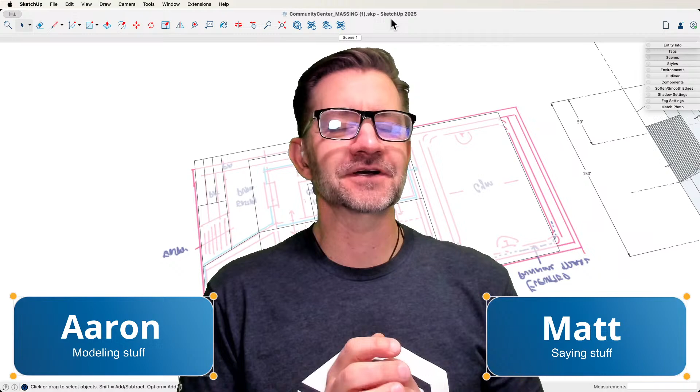I figure there's a couple ways to go. We could just hop on here and start modeling something casual. But we figured it made more sense to talk about the new version. Let's get into it. What better way to do that than by exploring the model we've been using for the imagery and the videos, the community center model you guys have seen already. Let's talk about how that got made, and through that, let's talk about SketchUp 2025 and the features in there.

It's fun because you really never know what you're going to get when you stream. You can test things and it'll be fine over and over again, but then sometimes it just isn't. Let me try adding this.

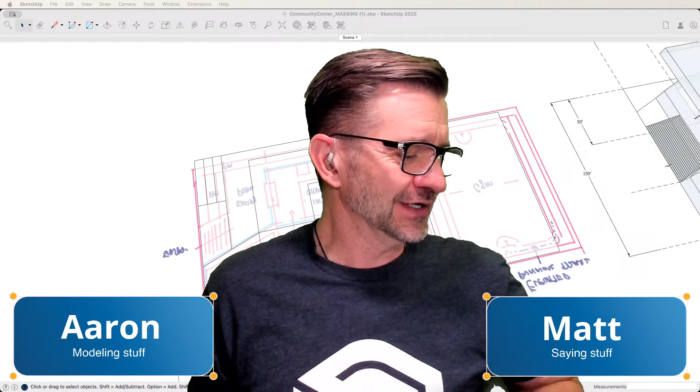I need to make sure I bring Matt with me, so we're gonna switch scenes and it'll be quiet for just 1 second while I bring him in there too. So let's hop over. Goodbye, my love. Hello. Nope, he came right over. That was perfect. All right, everything worked out except the overhead camera is not working now. Oh, good times. Good times were had by all.

I want to open this up though. I want to throw this out into the Chativerse. Have you gotten 2025 up and running yet? And if so, what's your favorite piece? Let's hear some feedback. We did have everybody chiming in from where they're from, and as usual, we got an international audience here. We got people from all over the globe. Somebody was saying it was like 8 p.m. their time.

So it's commitment. Yeah. Oh, I'm not gonna be here. Or you look forward to it all week. 8 p.m. on Friday, I know where I'm going to be. That's right, I don't have to make plans for Friday night. SketchUp's on. Yeah, that's good stuff. I'm booked.

Yeah, so we're here, we're doing this. Looks like everything is working now. So we want to talk about 2025. We want to talk about the version. We want to talk about some of our favorite features. We want to hear from you guys.

Having installed 25 is not a requirement for enjoying the stream. In fact, we want people who haven't gotten into 25 yet to show up and tell us their questions. Ask, what are you thinking about 25? What questions do you have? What do you want to see? Let's hear it. I can't say that we'll be able to go in depth to everything, but we will do our best to show what we know about 25.

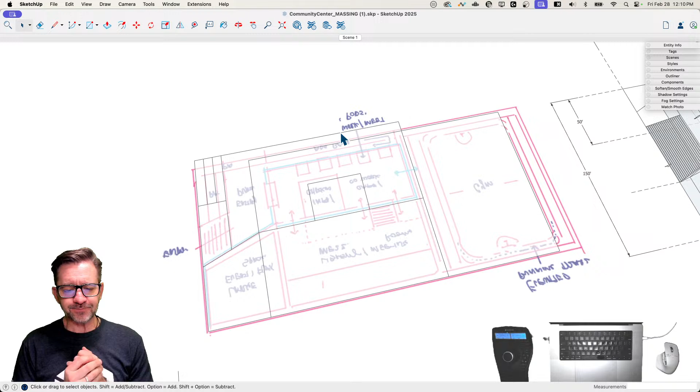So what I want to show real quick is Eric's initial massing model. For those who don't know, Eric was with us for 7 or 8 years, I think, and he was on the SketchUp team. He worked on the Campus—his Campus courses are still up there, and the videos he made as part of our team are still on YouTube. But he has moved on to a different opportunity, something he wanted to try. So, all good—good stuff.

I talked to Eric earlier this week. He's doing good, he says hi, and he was actually going to try to drop in here too, so we may see him in the chat as well.

He started with this, and you can see shadowed underneath this initial 2D layout, he has a hand drawing he did on his iPad. You can kind of see what he was going for, the flow of the building, with this entryway, a 2-tier or 2-floor section here, a theater space here, a gym over here. He started with this hand drawing and then came in with these 2D shapes and mocked that up over top.

So moving along here, here's kind of some... I'll pop in real quick, we did have a couple questions in the chat. Bring it. Not to derail you too badly, but I'll let you get a sip of coffee.

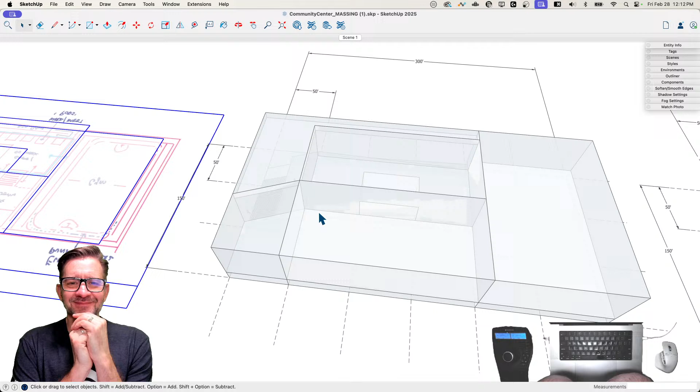And can you start over? Yeah, we're basically just starting now, so you're in luck.

Thanks, Randy. Okay, so we have kind of a sugar cube massing model here. You can see it's a lot of the 2D shapes just kind of raised up and played with a little bit, just to see how would that work, and some preliminary dimensions - how big is this building going to be, what's a realistic size, that sort of thing.

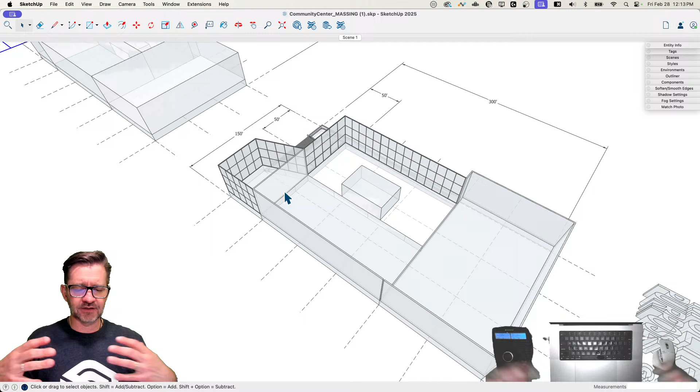So moving along some more, right over here we had some kind of initial look at the building front, where the glass would be, how would that look. We had this little blocked off section in the middle, the larger gym on the side. You can see the grids under here to give a layout or give an idea of the size, layout, that kind of thing, so you can work in pieces.

So you can see the initial progression, going from literally the napkin sketch - well, not literally, because it was an iPad sketch - that sketch, 2D, 3D, starting to put some texture, and you can also see the front entryway was mocked in here, with some quick stairs, a couple people, just to show the shape of that.

And this is one of my favorite things that Eric did - he took that space and labeled it in 3D volume. This may have happened before, but I thought it was really cool because it not only shows what goes where - your library, info, lobby, the plaza, the stage - but you can see he also gave height to it. In the gym, this is a full 2-story gym that's up tall, where the entryway is short and then it kind of comes up. You might also notice this is actually backwards of the way the whole thing laid out, so he's showing the progress of that design, how it changed around.

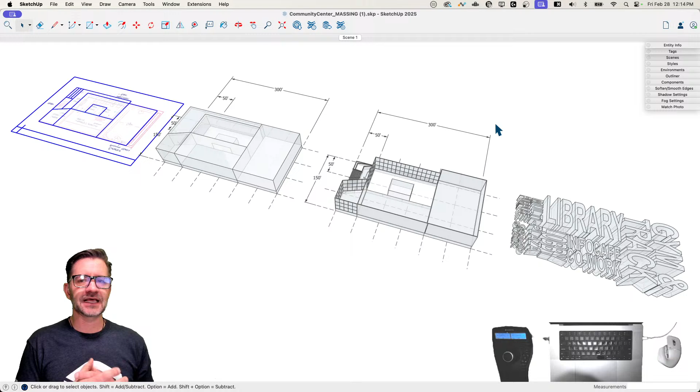So kind of cool, and it illustrates what SketchUp's really good at - giving you those 3D drawing tools and getting out of the way. This is not about V-Ray, not about visualization materials or anything else, this is just straight SketchUp right here, easy to get in there and make that whole thing happen. I wanted to share that because I thought it was a cool progression from zero to a 3D visualization of the space.

Yeah, and like you were talking about earlier, it's not as much work as making the model itself and figuring out how everything goes together, but the conversations that we had of like, what should even be in here?

You know what I mean? Like, what would a community enjoy to have? What would be interesting to have in here? So being like, well, it'll be nice to have the theater in the front because then people could look in and out and see it.

And then the gym area too, kind of. The whole thing was interesting to me, like just saying, oh, maybe there should be a place for meeting rooms or little work pods. And then Eric's like, here it is, in real 3D. And I'm like, oh wow, this is awesome.

So yeah, it's definitely fun to see it at that stage of the development, where the design is like there's so many things that could happen. So it's cool to see the shapes and the spaces come into reality.

And it's very interesting for us, because I've talked about this on streams before, how I got the best 3D modeling job in the world because I get to model whatever. It's a double-edged sword for me though, that's what I've talked about, is I don't get to really master any specific kind of thing because we always jump around with what we're modeling.

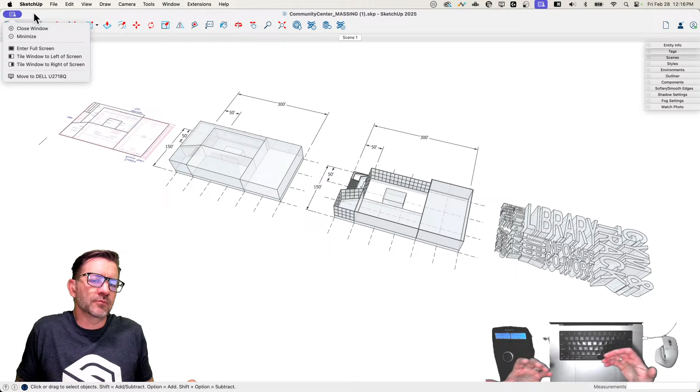Like, what would that be? Let's be intentional about this. Let's not just put things in there because they're going to look cool when they get new materials on them. Let's put them in there because the building makes sense, the story makes sense, and that was a lot of fun. Eric definitely led the charge, but we did go in and share ideas and review the process through SketchUp, which was a lot of fun.

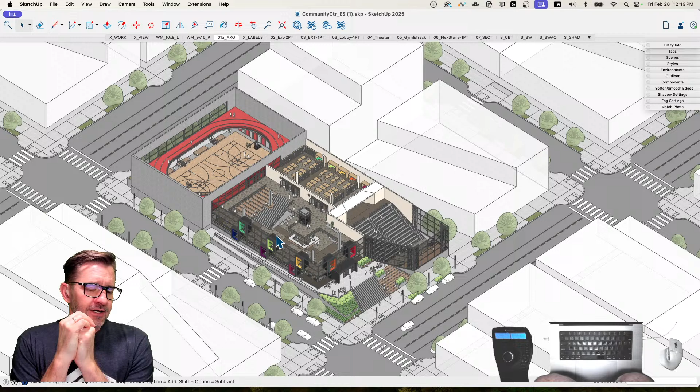Yes, show that process. Let's get technical on the stream. Hey.

Ooh, soon as we go to any Explorer window, I'm kind of, yeah, I don't know.

Just to touch on this seriously, one of the big things you've already seen in videos about 2025 is the visualization. I know we're talking about it and not showing it, we'll be there in a minute. It is an option on top of SketchUp. So if you like those white clay model working documents, working models, you can still do that. You can still go in with basic colors, no shadows, no image-based lighting. You don't have to use all of that. You can use SketchUp just like it was. But if you do want to go deeper and get those additional things, it's like a cherry on top of everything.

Yes, and thanks Colin for chiming in that you can get the old materials on 3D Warehouse as well. There you go.

All right, so let's hop in here because I want to get to that stuff. So what we're looking at could technically be the same in 2024 or 25. I want to get through this.

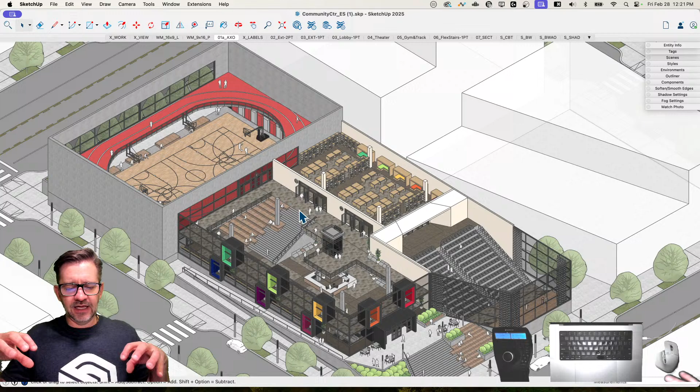This is a look at that model as Eric started filling it in. You can kind of see here how those different blocks of spaces came together. Here's the big two-story gym at the back, here's our front foyer, grand stair, the welcome desk, the information desk, lobby, meeting rooms, library, the theater. You can see how the pieces, the different modules, kind of stuck together and then all worked into one piece. I'm not going to go through all the tabs here, but this is one of the images I think is really cool because it's got that cool isometric look, which I think is a fun way to see an overview of a building. You can also kind of see how the different chunks transferred into that, and I just think that was super cool.

Yeah, one thing I really like too, right towards the center, you can see that staircase, and then there's kind of the bigger stepped wooden staircase. I thought that was a really cool addition. You can sit and hang out, have a little more room to talk or have a coffee or whatever, built into the main stairs. So I thought that was cool. Absolutely, I think that's an amazing space.

I also wanted to call out, this is something we learned as the creative team at SketchUp. If you look here, there's these little images. Right here I have a little guy running, here's a little book, here's a comedy and drama mask, on the information desk there's a little eye in a circle. A lot of the content we create ends up getting localized for different languages, so we need to be conscious when we make models that we can't put in big blocky text. We can't just say gym this way because the word gym doesn't mean anything in Brazilian Portuguese - that might be a lie, that might be the same exact word, but there's a language out there where gym doesn't mean anything, and we probably translate into it.

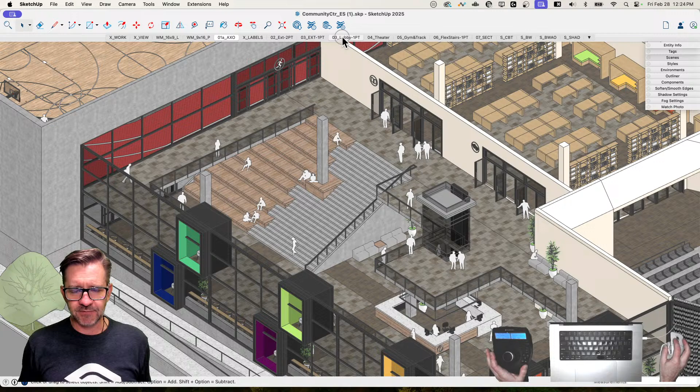I'll click through a couple of things here. These were the kind of images we were looking for. We knew this work was done just with modeling - you can see a little AO, a little ambient occlusion, but these aren't the new materials, and there's no image-based lighting at this point. This was just to create a model we could take further.

But here's the lobby, the theater - again, very intentional about these. These were the kind of shots this model was built around, how can we have, in one model, some very different looking spaces. And yeah, this is why the Community Center is so cool.

Sorry to interrupt, but one thing Eric did too was make this model kind of a SketchUp version and also V-Ray ready. So the curtains aren't actually that material - or they are that material, but when you bring it into V-Ray, that's like a V-Ray material. The trees have this weird outline, but those are V-Ray trees in there, so that's why they look like that.

So another piece too that Eric included in the model. We also had a question from StudioRT Cool.

Can skydomes from V-Ray or SU Podium be used by SketchUp 2025? So SketchUp 2025 can import environments that are HDR or EXR files. So if you can get those skydomes out of those programs as either HDR or EXR, then yes, you can import them into 2025.

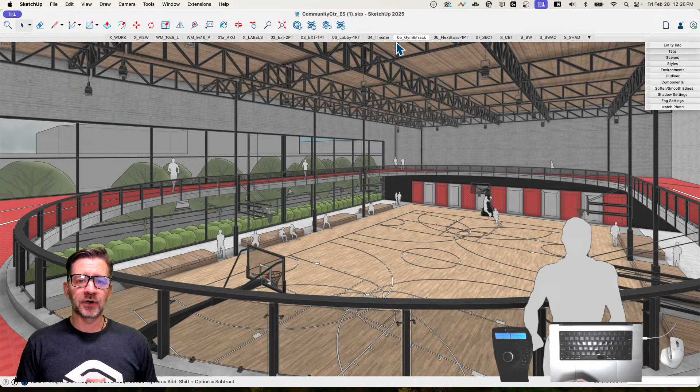So it was a cool opportunity to come up with how many different spaces we can create in one building. I mean, obviously we build a lot of office buildings, we build a lot of homes, that kind of stuff, and there's lots of cool views to be had in those buildings. But this ended up with a set of very diverse looks and feels in the same building that still made sense to go together.

It doesn't feel like - that was another thing done intentionally and it worked out very well - like we took a bunch of disconnected things and just jammed them all together. It's done in such a way with intentionality that the whole building works together.

I wonder if this ceiling was inspired by the Vancouver Convention Center, because it's giving me those same vibes. Yeah, it certainly looks like that for anybody who went to 3D Basecamp in 2022 at the Vancouver Convention Center, or you could just have been at the convention center before. But yeah, that's a cool ceiling, definitely vibes of the VCC.

So this is about where Eric got to when he left our team. We knew we weren't done with it, so we brought another guy back onto the team.

Justin Horstman, who was our designer for a number of years, came on to come in behind Eric and work on our models. And I'm going to share the model that he got us to. So this one right here, you guys probably recognize as the model you've seen in some of our videos already.

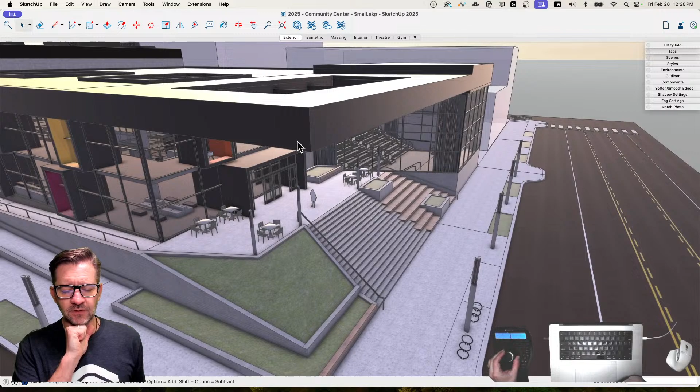This model is built from the exact same - a lot of it is exactly what Eric built - but you can see we got new materials on there. I should give Cassidy Shipley credit as well, one of our product management team. He spent some time on here adding materials as well, just to get the most out of it, get all those PBR materials on here.

If you haven't seen this before, I want to walk through a couple things. As I spin around this, I'm using my 3D mouse to move in 3D space, but look at how the light changes. It's not quite as simple as materials getting brighter or darker, more light or darker light - there's actually colored light coming off of that image of the sky dome and changing how it plays on surfaces.

I know I did this in other videos too, and I apologize, but it's such a clear illustration. So right here we have this shiny black material, some sort of metal facade. As we turn it this way, you're gonna see the orange from the sunrise hit across here, and because it's shiny, that orange color actually creates a gradient across there.

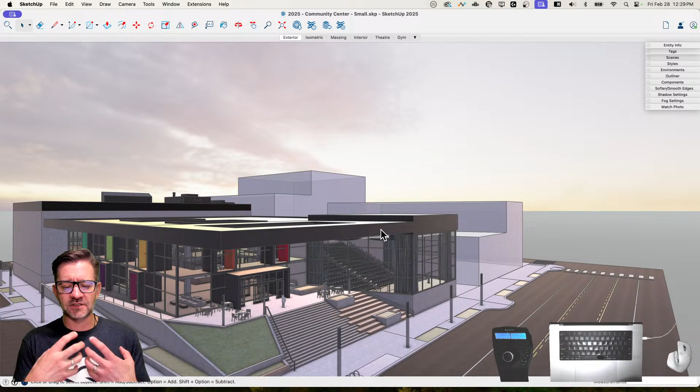This is what image-based lighting and physically based materials are all about. If I look at it from far away, that's great, but as I tip it like this, more and more of those colors come in and you can see them reflect off of those materials. Each material reflects a little differently - harder or polished materials reflect more light, and rough ones reflect less. That's what this is all about.

This is so cool. Yeah, definitely from this distance you can tell the reflections in the big surfaces. But if you've worked with PBRs before, you know that when you get up close, that's when you really get to see the nice normals coming out and all the properties of physically based rendering. You can definitely tell as you get closer in, so for interiors or anything where you're closer, those materials really pop.

So let's fly in here. You can see - again, this isn't rendering, this isn't ray tracing. I'm not picking a light, copying it in, and having it stop when it hits something. The whole building is lit off of these environments. So I have that same warm glow coming in on the inside, and I can see this as if that sunrise sun was coming in from the side of the building and hitting these materials.

There's a good example right there. Yeah.

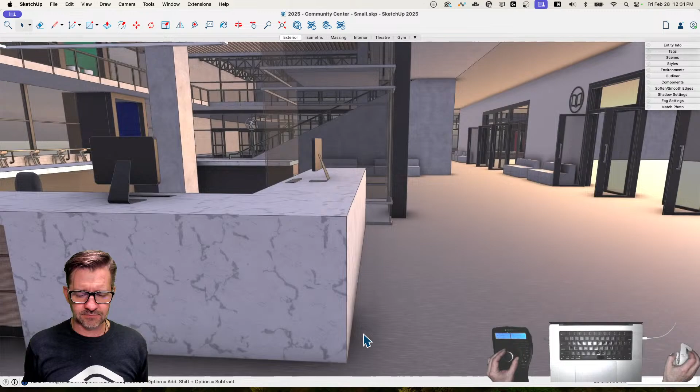Colin has a clarification in the comments I want to say out loud too - I think I maybe misinterpreted Studio RT Cool's question before about V-Ray and Podium using environments. Right now, V-Ray and Podium won't recognize your SketchUp environment, and that's what Colin's saying. You'd have to add that in the V-Ray asset editor. Potentially some interoperability could come in the future, but if you sent this scene as-is to V-Ray, the Sky Dome in SketchUp would not show up in V-Ray. I just want to be clear about that.

Randy asks, is this SketchUp 2025 out of the box? Yes, it is. You have to add the new materials for them to have the photoreal material properties - you can't just bring in a model that previously had materials added. But yeah, this is no extensions or anything. This is just what SketchUp looks like.

That's the thing I want to point out too - one of the things we lean into is SketchUp being quick and easy and accessible, and that's exactly what this is. If I was to come in here and just start modeling, I could, just like normal SketchUp, except it has this look and material that's different from what I've had before.

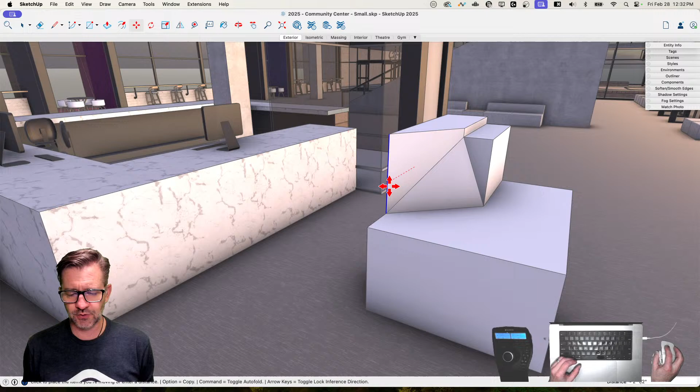Look at that - see how that light changes under there with the ambient occlusion. The materials are showing up on the side, lighting up in the sun. This is all just SketchUp, which is the super cool part about it. And now it has this nice cool sculpture in the middle here - you could probably sit while waiting for the elevator. That could be a seating opportunity, or an art piece.

Something just to mention, because that's what we do here - just to talk about the intention here, what we're really shooting for, because V-Ray's already come up a couple times. There's V-Ray absolutely - I'm gonna get this, it's bothering me, that's a walkway that shouldn't be there. Had to get rid of it. But one of the things we want to talk about is...

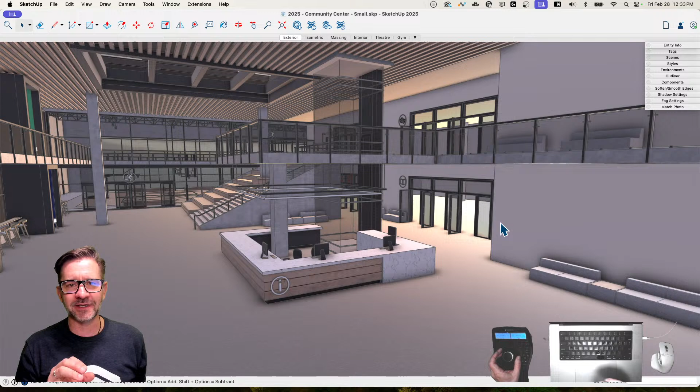Final rendering still has its place. I was just talking about ray tracing, full shadows, interior versus exterior lighting, adding lighting elements - all that stuff is super important to a final model, and that's not what this is intended to be. People, we've already seen comments: how do you do this, how do you do this, how do you do this. There's a lot of stuff with final rendering that you could do that isn't possible here.

It's intentionally not part of this. This is just a better visualization than we saw before. So that's what we're shooting for. That's kind of what the intention is with this visualization stuff in 2025.

I want to get in here and play around a little bit and work with some of the tools. One thing I want to go through is taking a look at materials. Let's grab some stuff off of 3D Warehouse and put some of that in. Let's look at environments, play with environments, and do some of that visualization stuff.

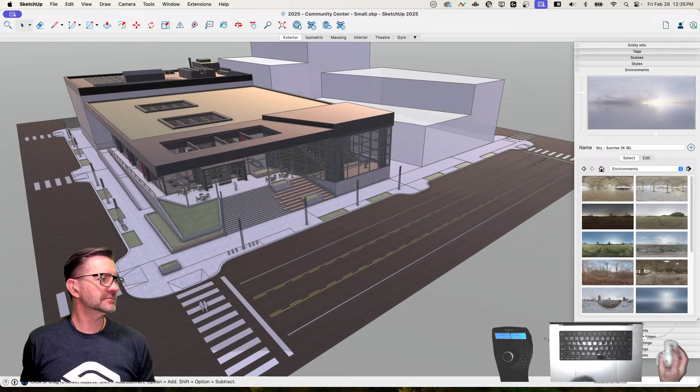Earl points out that if you want to work with other people who are using 2024, in order to pass files back and forth, you would... I suppose no. No, 2024 should be able to open a 2025 model. So yes, I stand corrected, should be okay. I'm using that word intentionally. You should be okay.

Paul says he doesn't want SketchUp to be a render program for him. No problem. Don't put the environment on and don't use the new materials. You're all good, you can just keep using SketchUp the same way.

Soon AI will do all this and you'll be out of a job. Sorry, guys. Yeah, perhaps true. But hey, who could have the personality and the screen presence of Aaron? There's no AI avatar that could bring that kind of heat. So I think his job's safe for a while.

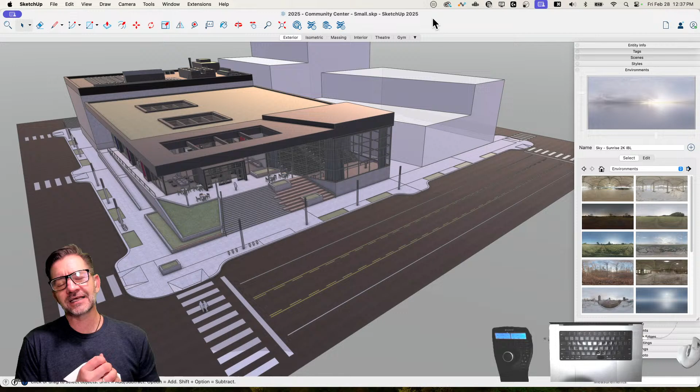I just want to weigh in on that too, because there's lots of people I know who probably said that tongue in cheek, and I get it. A lot of people are concerned about AI, and I would just say that AI is a tool. I think designers who use AI will probably become more proficient and be able to do more with less than people who don't use AI. So I'm a big advocate of AI as a tool. I don't think AI will ever replace human beings' heart, soul, creativity - that all comes from people. But AI as a tool is something that should be seen as advantageous, and we should be able to leverage it.

What Mac are you using? This is super smooth. We should also note that Justin made this version specifically so it would work well with the 3D mouse and everything. There's another version that has fancy cars and trees and stuff like that in it.

But yeah, this model definitely is running pretty quick. And you're on a laptop, right? Just like a MacBook? I'm on an M2 with 32 gigs of RAM, so just a MacBook Pro.

It's not a monster. So yeah, the previous version we had all those rendering assets - high poly cars and about, I don't know, 200 people I think were in there, and 9 city blocks of streets and mocked buildings like this. So it was a much bigger model. This model was actually trimmed down so it performs better.

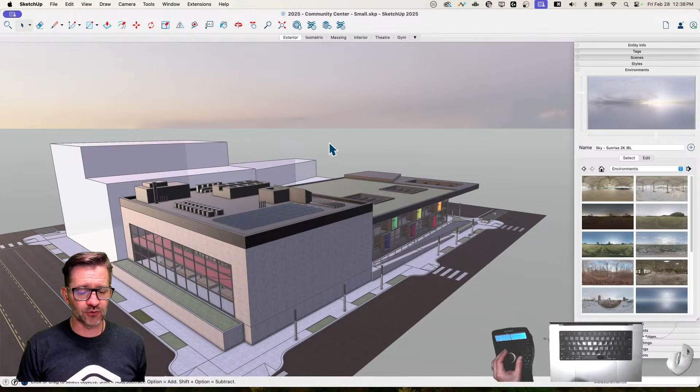We'll make this model available to you guys. This will end up on 3D Warehouse. We'll put a link up on the forum after the stream so you guys can actually download this and play with it, because there's no magic or anything happening - this is just my normal laptop that I model on every week.

Nothing on my sleeve. That's right, my sleeves are all the way up here. But yeah, so I understand the question - the question being like, am I using just a monster laptop? And the answer is nope. This is really pretty basic, pretty simple.

I think that's one of the coolest things about the new visualization stuff is that it works real time like regular SketchUp. I didn't notice any difference from shaded with textures in 24 to all the new stuff going on now. Everything still is really snappy. I'll just say one thing I've been reminded of: shadows still work the way they did before. So if you saw delays or stuttering with shadows on, that's still the graphics engine processing shadows the same way it did before. If turning shadows on used to make your machine jump or take a second to render, that's still the same. But all the rest of this, the image-based lighting and the photoreal materials, is just as smooth as image materials in the past.

Somebody asked a question: if you take a 25 model into 24, the environments won't go along with it, and the properties of the materials won't show up. I believe the image that the property is based on will show up, but it won't have the different values, the metalness, the roughness. The normals won't all be included because the engine's not there to render that.

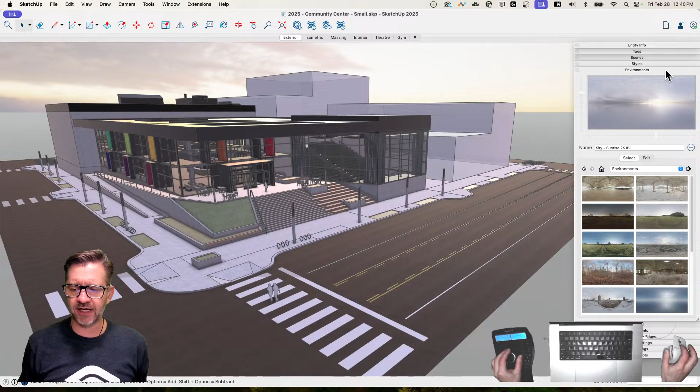So this is new, a new panel in 2025 or iPad version 7, called environments. What environments lets us do is come through and pick different environments. Right now I have this sky sunrise environment, but if I want to switch this to another one, see how everything got cool there.

I'm gonna do this too. I'm gonna go into my styles. Styles and environments are two different things. Environment is something you can save into a scene, but you don't control environments through styles. Styles are still the same things they were before. I'm going to go to edit and turn my ground plane off. It's going to look a little weird because I'm floating above that ground, but I wanted to get rid of that flicker of the ground plane so I could show you what my full sky dome is.

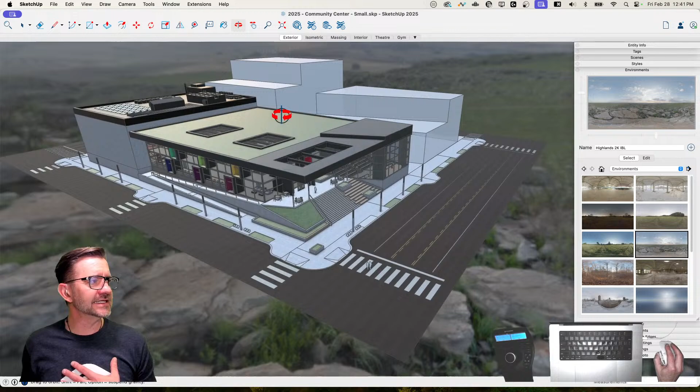But you can see when I did that, look how different the colors and reflections are. I was talking about this panel right here — if I look at it now, it doesn't get that same orange glow moving across it. It's kind of got this cool blue because this is like a cloudy midday rather than, or I guess it's sunset, I don't know. The sun's in a different spot, and it's not quite as warm as it was before. So as you go through these different environments, it changes that sky dome, but it also changes the color and feel of the lighting on the rest of the model. Those are basically the two things environments do.

So I'm going to go back to my sunrise environment because it has such a drastic impact on this model. I'm going to click edit, and when I click edit, I'm going into these pre-made environments, and it gives me my options. The options are pretty simple — again, the developers did an amazing job of keeping this SketchUp-y. All right, I'll be honest with you guys, I'm gonna break this down for real.

I go into a lot of rendering software and stuff, and I've seen people make rendering sing, amazing output coming out of rendering engines, and I love it. But I go in there and get so overwhelmed — so many options, specular levels, words I can't pronounce. It's one of the reasons I like SketchUp so much, because it's always been very intuitive and approachable. I think these environments do a great job of giving the ability to edit without making it overwhelming or putting too much into it. Props to the product management team for being very intentional and thoughtful about what things to include, and most importantly what things not to include. You definitely could have more control if you added a bunch of different text fields for specific numbers, but then you open that panel and it's like, okay, what do I even do, where do I start? So yeah, I agree.

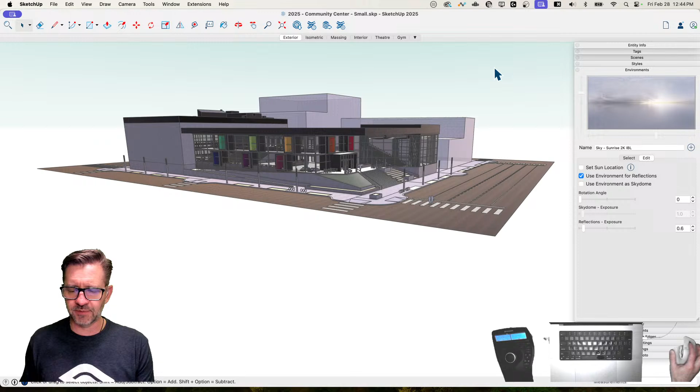If I turn the sky dome off, I'm just back in a regular SketchUp world with a color for my sky and a color for my ground. The other option is to turn off reflections, which keeps my sky dome, but gives me just my plain old SketchUp model.

So if you like this look and feel where you want to just get in and have flat materials and work from that, you have the ability to do it. You don't have to go in and use the better way to do it. I was kidding — use it how you like.

If I turn both these off, it's SketchUp 2024, basically the same engine we saw before. If I do turn these on though, that's when I get the look in the back.

If I look at set sun location, up here I have an image — this is kind of my 3D 360 degree ball image laid out flat in front of me. If I turn on set sun location, it'll let me change where this sun is at. By default, these environments have the sun set to where the sun is in the image, so the sun's right here.

But if I turn this on, I can start to move this around. You see how that shadow on the ground changes? I can actually move the sun to change where the shadows fall, so it changes where that is in reference to the image there. That's how you can work with matching — if you had shadows turned on also, you could match your shadows to the global illumination if you wanted.

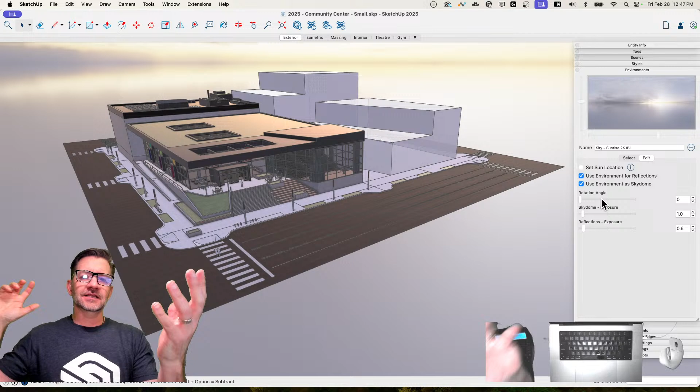So right here we have this rotation angle, and what this is going to do is take that entire environment — the sun, the light location, the sky dome — and let us spin it 360 degrees. When I do this is where I'll actually see how the colors are changing on that model as I move it around, and you can see the image in back spinning around too. This is how I would change that.

So if you wanted to get the perfect setup, say I want to get the light coming in right through the front door, I could bring it around... so there we go, it's shining on the front right there.

And then if I wanted to match the shadows, I could turn that back on too, and change my sun location so the shadows are going back from there. So you could do that kind of thing to get the exact look and feel you want using that.

The other options I have down here are my exposure — exposure for the sky dome and exposure for the reflections. That's exactly what this is, just a lightness to darkness slider. If I slide this up, my sky dome gets brighter, versus down makes it disappear. Same thing with reflections — if I slide this up, it's going to eventually just totally wash out my model.

If I drag it all the way down, I could model in that if I wanted to. Dark mode — boom, did it. Hidden dark mode, secret dark mode. There's a shortcut for you.

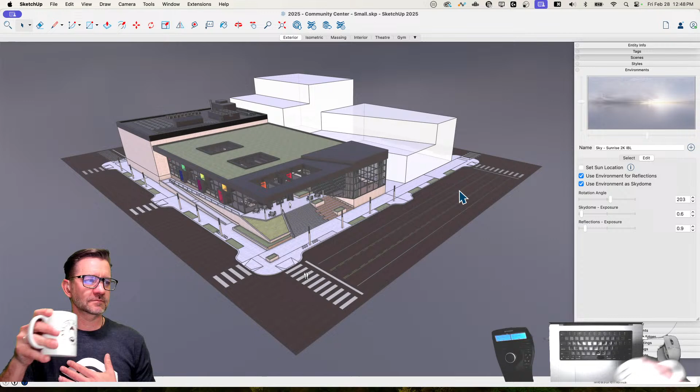What's really cool about environments is that all this stuff can be saved to scenes. There's a new checkbox under all the properties that you can save to scenes, and one of them is environment settings.

In styles, I mix up styles and scenes probably every day. Wait, where is it? I know that drop down exists. They're both S words, one syllable, pretty much the same.

You could save it, and it'll work kind of the same as it does with camera location and shadows - if you have the environment rotated to a certain degree, it will animate between the two scenes from one location to another. So you can have it on or off, or any combination of rotation, sky dome on and reflections off, or whatever you want to do.

It's just assigned to scenes, so you don't have to manually go in and change it. I think that's pretty cool.

Someone in chat said they want to learn how to make these, but that's another world of discussion. I'm actually working on a video right now where I create my own sky dome, so keep a lookout for that.

If you want to do a real world one, obviously the one Aaron's in right now is kind of this floaty world thing - this wasn't taken in real life. The one I am doing is like in real life, but really, as you can see with the preview, it's just a 2D image that gets wrapped around.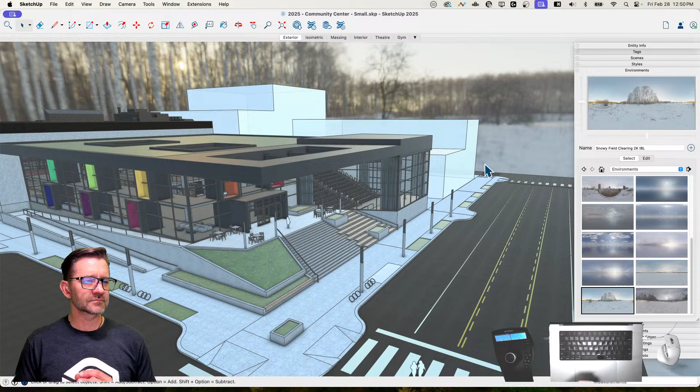Marty's asking about the ground plane. All I did was go into my style and turn my ground off - you could always turn it back on. Then just what's above the ground plane will show on the sky dome. Only stuff above the horizon.

Which is how this model originally was. I turned it off just to show you the bottom of the sky dome, but it really doesn't make sense to show what's under there, unless you have a purpose-built sky dome for a specific location, then I could see that making sense to get that exactly where it's supposed to be. Really, it should be called a sky sphere because it is a full 360 sphere.

We are selling ourselves short. We are absolutely... Sky double dome. Yeah, sky...

So that is a look at environments. Right now there's 18 environments that are shipped with SketchUp, so you have the ability to get into those.

That same set of 18 are available on 3D Warehouse. I don't know how you would lose them out of your model, but if you did, you could always go grab them off 3D Warehouse. And the word on the street is more will be available in the future, so that'll be cool.

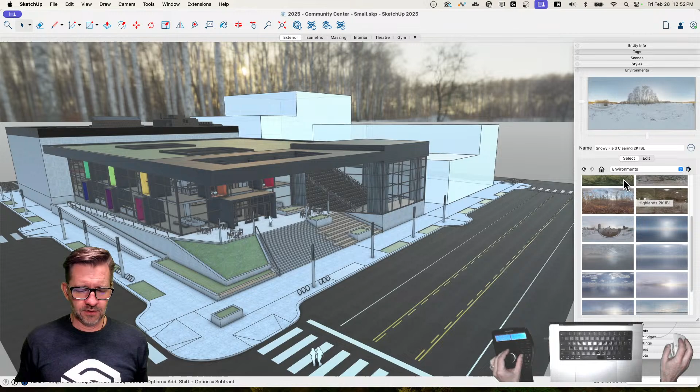You can always find a lot of freely available, either Creative Commons licensed sky domes online, or pay for licensing one. There's a lot out there - if you just search for sky dome or HDRI, there are a lot of options to import as well. It's super easy to import, you literally just hit the plus button and it's in there.

Let's talk about materials. I just made a couple of monoliths. You can see as I pulled them up, AO is already on, so I got these nice little shadows where they're sitting on the ground. Super cool. Just with this white material, you can see as I move it around, it's subtle, but you can kind of see it turning more orange as I get the camera back towards the sun.

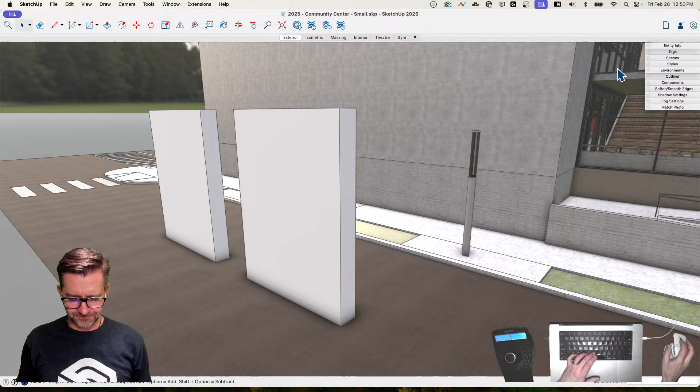Let's talk about putting some cool materials on here. I'm going to grab my colors window.

No, the colored pencils are not part of 2025, this is a Mac thing. It's the default way it shows colors - Windows has the swatches, Mac has colored pencils. So I'm cutting that off ahead of time since sometimes that question comes up.

Just want to cut that right off. I want to put a couple different materials on here. Actually, let's do more than this. Let's break each of these faces in half, and maybe we'll do like 4 different materials on here. Let's throw this shiny metal right here. Awesome. And then let's go grab a glass texture.

Reflective texture right there. Oh yeah, so here we have some shiny stuff. If I really lean into it and tip my head over, looking over there at the material, you can see that sun shining. On the metal, which is shiny but not fully reflective, I have some texture. You can see that bumpiness showing up there, and you can also see the reflection of the sky dome on it.

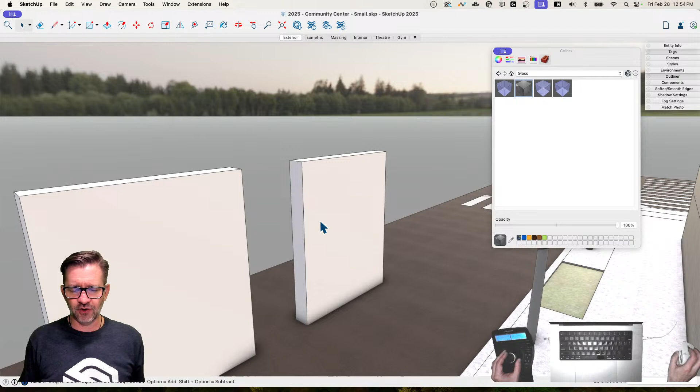If I look at the glass here, which is fully reflective but transparent, I'm actually seeing the back of the box, the openness of this box behind it. But you can see full reflection of this.

I want to point out again, somebody asked this in a video, am I going to see reflections of - so if I come in here and draw another rectangle right here and bring this up, that's not going to reflect into the glass. This is not ray tracing, this is not full rendering. I'm not going to see reflections like that, no matter what angle I look at it. All it's going to reflect back to me is the actual sky dome on the outside. I just want to head that off because I know that's coming.

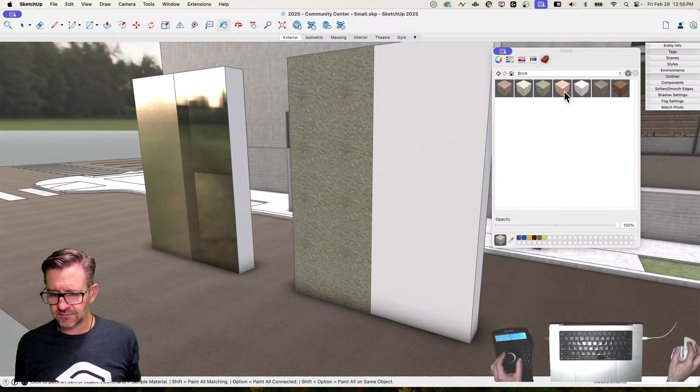So let's put some rough materials on the second monolith. Let's come in here and go grab some asphalt. Let's see what we got for some asphalt or concrete. Throw some concrete right here. And then I want a brick, I like brick. Let's grab brick. Let's try that brick. Yeah, it looks good.

As we come over here and look, same thing, I'm going to tip it over to the point where we're getting these harsh reflections over here. You can see on here we're not getting the same reflections. This is a rough concrete, not polished. You can see that it looks like it gets a little lighter or darker, but it doesn't actually reflect. I get a little bit of hue from the light coming in because it's a warm light, but I'm not getting a reflection.

This brick here is a little bit polished, not quite as polished. I'm not seeing the full reflection. You can see it's a little darker down here than it is up here just because of the way the colors are coming in from the sky dome. But you can see as you do this, I'm seeing little reflections different on the face of the brick than I'm seeing in the grout. See that? The sun's coming in and it's hitting on the bricks - the bricks are getting real bright, but the grout's staying a little bit darker. That is what these materials are going to do.

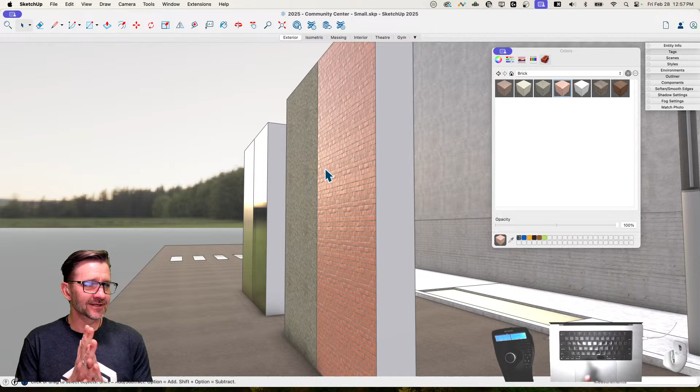So there's just a handful of examples of out-of-the-box materials. I haven't touched anything yet, I haven't adjusted anything - that's just those materials and showing how they look as they interact with the environment. Did you want to edit them and take a look at the different ones to see what the different settings are? I just wasn't sure if there were questions, so I wanted to stop for a second.

One question about file size and sky domes. Just like SketchUp in the past, if you have a lot of materials, that's going to be in your model and saved inside your SKP file, so that size will go up. The environments that ship with SketchUp are pretty optimized - they're not 16K, 100 megabyte plus files, so they won't completely blow up your model, but every time you click a new environment, it'll be in your model, so just be aware of that. Partially due to that, but also to make sure people's models are nice and clean, when you save your file in 2025 you get a reminder to purge unused, which you could always get to if you go to model info and statistics and go to purge unused. But now every time you save, we're going to see this.

This is the same purge unused feature you're used to. It's just a reminder to do that a little more often, especially since materials are bigger now because they have all the maps, which we'll talk about, plus environments and stuff. Always good to keep your model light with only the necessary stuff in there.

I should mention that if you have a workflow using templates with a lot of pre-made scenes and tags, you don't want to purge unused because that will get rid of all that stuff even though you're going to use it. So you can turn that off if you want, you can turn the reminder off.

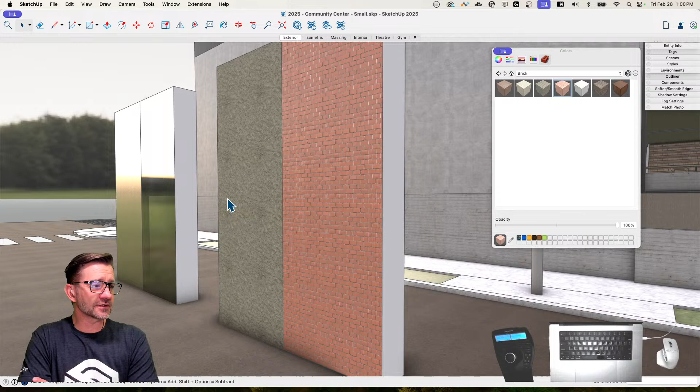Two things I want to recognize: two people caught my 'sure bricks a lot' comment. One of them was Eric Sargent, who I want to welcome since we were just talking about you earlier, Eric, good to see you. We said very positive things earlier, the community center is Eric's baby. That's right, absolutely.

All right, so let's talk about these materials. Let's look at a couple things here, starting with this glass.

If I come over to my material list, one big difference from before is materials are now shown on cubes where I can actually see a preview of light, neutral, and shadow for any given material. That's why it's a 3-sided cube, so I can see those different values, including things like translucency. When they were just squares before, some of that stuff was hard to pick up, so this is nice.

If I look down here and pick this material, double click it, it shows this is the glass mirror, and here's what's included in a material now. We have opacity like before, how see-through it is, and this glass is really non-opaque, really see-through-y, whatever it should be called. There's also the name of the texture and the size of the full material.

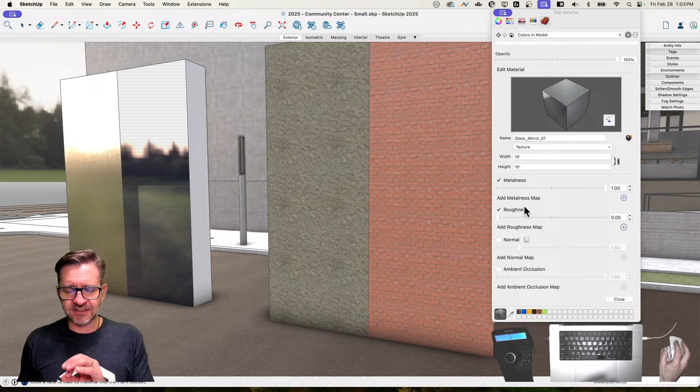Roughness behaves differently on different materials. This is glass, so it's basically fully smooth - it doesn't have a normal map, so there's no bumpiness anywhere. Roughness behaves a little differently by kind of canceling out metalness. That's a dumbed-down explanation of how metalness and roughness work. We've heard explanations that go into much more detail internally, but boiled down to a single idea: roughness and metalness on a flat surface like this kind of cross over each other.

I think of roughness as how much light is scattered. You'll notice when we turn the roughness way down, everything gets glossy, like it has a top coat of something, like polyurethane poured over it. As it gets rougher, it scatters more light instead of the light just bouncing off. It's hard to put into words.

The question came up - I want to call this out so we're conscious of it when it comes up. We had the question of how this would work on older gen hardware, a couple years old. My laptop is two years old, my computer is from 2020, and it flies. I know it seems like this would be a great spot for us to pull a fast one and make everything look better than it is, but we're not - we're showing exactly what we've got going. So again, this is a perfectly flat material.

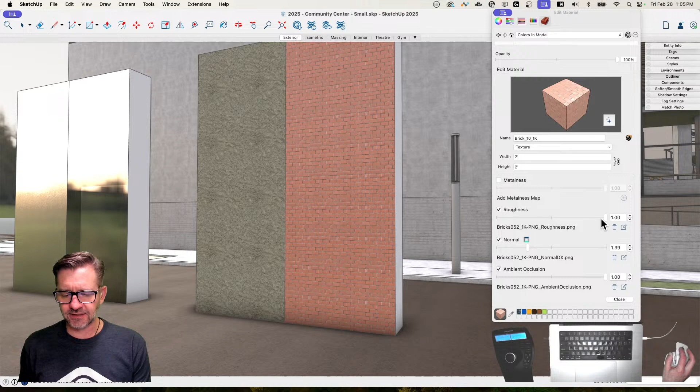So here we have the same information up here, and down here metalness is turned off, the roughness is cranked, and we also have a normal value and an ambient occlusion value. Let's get snug and see this thing. With metalness even turned off, we're still seeing some reflection, and that's normal.

If we drop that roughness - look at that, see that? It almost looks wet, like there's a coating of polyurethane or water poured over the top, just by dropping the roughness down. If we crank it up more, you can see it's drying out. It's almost like at a really small level you have these holes that are filled in or not - with roughness you can control how much light is returned off the surface versus how much is absorbed into the roughness of the material.

Normal works similarly, and it's a slider too. Let's get a more exaggerated view - look at that right here next to the box, how it goes from looking like a 2D image to something I could reach out and feel, like I could feel it on my monitor.

I'll say this - sometimes with roughness and metalness, I've played around and found that a material ends up being either all rough or all metal. My materials tend to be one or the other. Normal ends up always being somewhere in the middle, because if I crank it all the way up it looks bad - it doesn't look good. So depending on the map that comes in with it, somewhere in the middle is what looks best. I definitely think of normal as the depth, the appearance of depth.

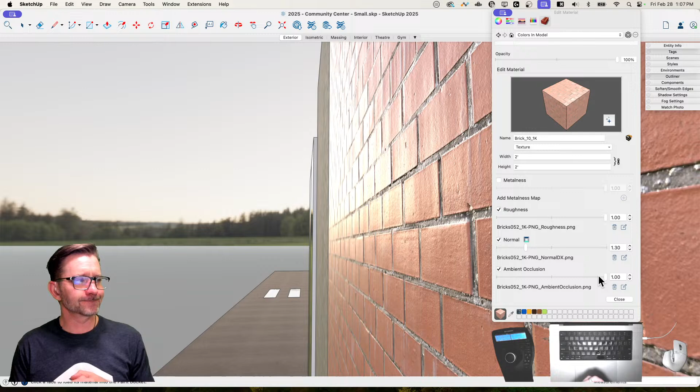So one thing that's different between metalness and roughness and the other two maps is that you don't need a map for metalness and roughness. If you just bring in a regular material, you can just slide the metalness and roughness wherever you want. A map is like an image that the renderer references to say where should I have more of this and where should I have less of this.

And so you don't need those maps, but for normal and ambient occlusion, you do need maps. Because if you didn't have a map for normal, like to talk about depth, it only moves in one plane, it's not really showing any depth.

But obviously the materials that ship with SketchUp, or that are on the 3D Warehouse in the content library, have those proper maps already applied, so they're in there automatically. We saw the glass didn't have the normals or ambient occlusion, or any maps for that matter, even on the metalness and roughness. But ones like these bricks have the relevant ones already in there, set to a basic setting.

And then there's also that little flip toggle that you just hit too. If you do import a material and add a normal map and it looks off like that, it doesn't look like bricks. There you go. That little toggle is a nice little switch to try flipping for your normal map.

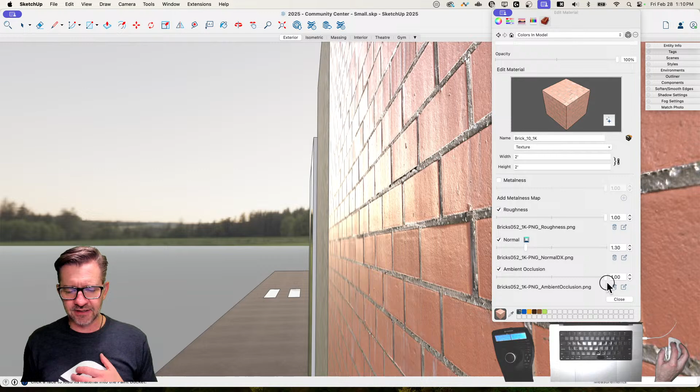And I can actually change how strong that is in the material. So it's subtle, but you can see it's almost like selective shadowing, darkness in the model. As I slide this back and forth, I'm not necessarily seeing a big change in the brick, but if you look at the grout, how much shadow and darkness I see in there is increased as I slide that ambient occlusion up and down.

I was saying, the nooks and crannies. That's right, make sure I know that they're there. Kind of like metalness and roughness, with the ones I've played with, I ended up cranking ambient occlusion all the time or just turning it off. I didn't really find a spot where - maybe it's because I'm not a subtle modeler, I need these bricks to smack me in the face. So yeah, I ended up turning my ambient occlusion up all the way on those.

But yeah, so this is the stuff you have control over. We have two more materials on here, let's just hop through and check out how they're set up. If you just stay in here and then say, yeah. There we go, so here's my material.

Like I said, if I really look at this, I can kind of see a little bit of that color coming in, but this is because the way this material is set up, that roughness is cranked. If I turn that down, then I can actually see it come in. But with roughness cranked, if I bring that sunlight in, look how you do see a little bit of texture because there is a normal map, but it's subtle, very very subtle. As that sunlight comes in, I am seeing it hit that a little bit, but when the roughness is turned all the way up, I just don't see it as much.

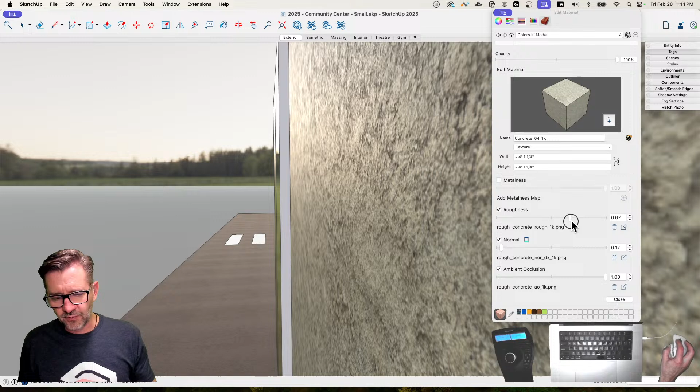So I'm gonna crank it up a little bit, maybe wet or polished a little bit, so that when I change my normals, you can actually see what that looks like. Where the other one had that bump map that was primarily grout, on this one we have a very dense roughness map. So as I'm sliding this normal up, you see all these bumps.

We had a question come up about, can you use different brick colors? Oh, absolutely. You can finish talking about this concrete if you want first. You don't have to.

So I just want to show this. This material, as we looked at it, didn't have nearly the shine or reflection of the brick, but you can see why — the roughness is cranked, the normal's turned way down, and metalness is off altogether. Ambient occlusion probably isn't going to make a huge difference either, just globally a little lighter or darker, but it's not drawing out the grout in the bricks like before.

Yeah, sorry, colors. Go for it, Matt.

Well, there's a couple different ways to have different brick colors. There's different brick textures that ship with SketchUp, and you can get different bricks from the 3D warehouse if you click the little 3D warehouse button in the top right.

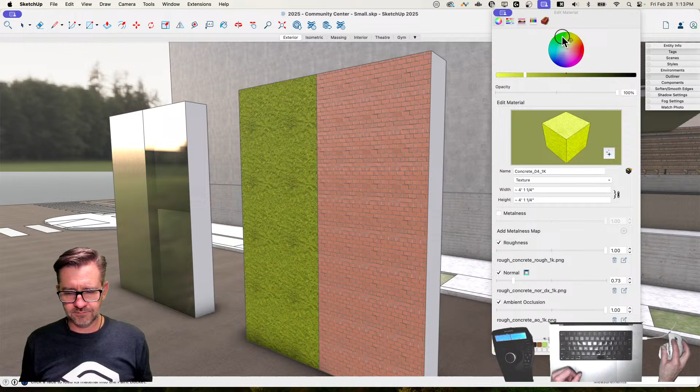Or you can edit the material like you would edit material in previous versions of SketchUp, if you're familiar with that. Once you sample it, you can use the color wheel or the HSB sliders — now we've got disco concrete over here — but you can do the same thing to the brick: sample it, then go to the color editor at the top to change it to a different color.

So I want to touch on something Matt said. If we come in here and hit the 3D warehouse button, it'll hop me in here. Well, apparently I haven't been in here yet — see this, tell me what's new.

But if I come in here, when I come into my libraries, I can see my different collections of materials. If I click into wood, I have a whole lot of options — a bunch of veneers, some wood planks, some log, flooring, real wood flooring, bark, plywood, got it all. So yeah, 70 different things at launch, different wood types, which is more than the default — if I look at the default and say show me wood, I only have about five or six.

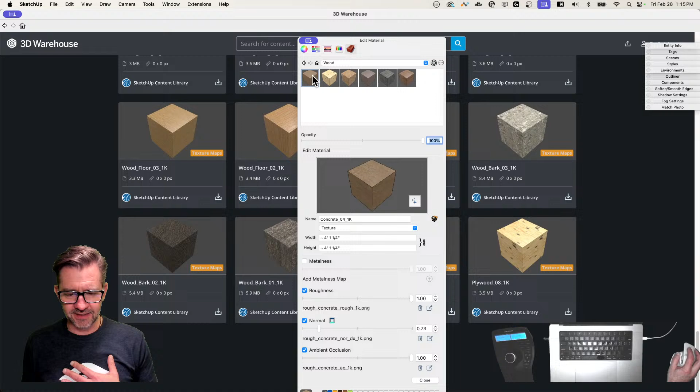So as a sampling of it, I probably have a veneer. I'm editing that other material — get me out of here. Stop, stop, stop. Right, there we go. Nope. Hold on, I got too many things going on here. Get out of there. Here we go.

Let's go into my wood again. So if I click through these different types of wood, I have a sampling there. But if I did want to, hitting that 3D warehouse button takes me in here, and I have those 70 different wood materials to choose from. Any of those, just grab right down — they already have all the settings for metalness, roughness, normal, and ambient occlusion maps included.

So pretty cool. It was an intentional choice not to include all of them with the installer — not everybody needs 70 different types of wood.

Let's see what some of these other numbers are in here: 106 standard colors, 36 tiles, 20 stone, 10 roofing, 12 different colors of plastic, 8 plaster, 122 patterns, 62 metal. One thing about the patterns too — the different maps really set the patterns off and bring them to life. In the past it was just a 2D black and white thing, but now that you can add the different maps and adjust that stuff, they really come to life and are a lot more versatile than they've been in the past.

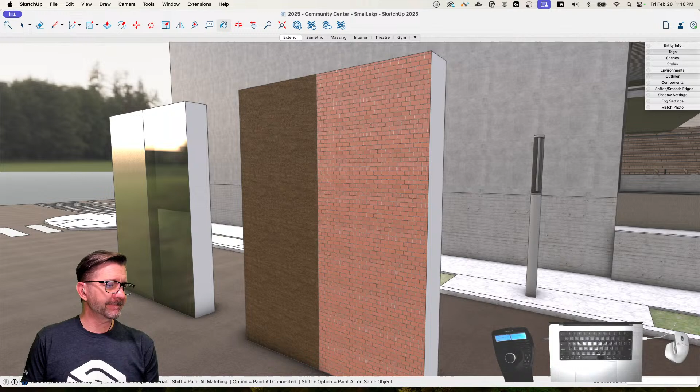Did you want to talk about adding your own materials? Yeah, let's. I mean, if you don't have a material to add, I can't show too much, but I do have a material to add. Bingo. Well, I guess I need another monolith, so bring this over like that. I'm going to put the default material back on there.

I have a tile, I apologize, you're going to see this in a video that's going to release next week I think, so you guys got to jump on it. Different information will be shared, but this is the same image. I was going to go grab some more tile and forgot, but this will still show. So if I just do import, it works exactly the same way.

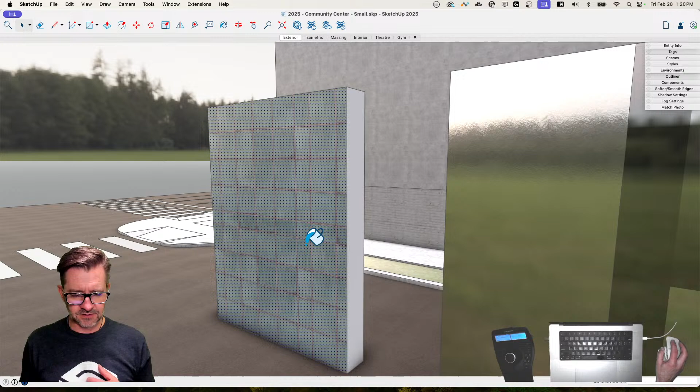Does this happen to anybody else? I lose my desktop link all the time. Same here, there we go, desktop. And I'm going to grab this tile, import it as a texture, and then just kind of put it on here. Nice big tiles, those are probably like 3 feet tall each, but easier to see here.

A couple things - number one, I cropped this horribly because look at these different size tiles all over the place, since I didn't cut the image on the grout. You can actually see here's where it cuts from one to another. At first I thought it was an intentional pattern, you have the big ones and then a little row of small ones. If I could just not be so honest I could take credit for this cool different shape, but no, I'm being honest, and this is wrong. They should all be squares.

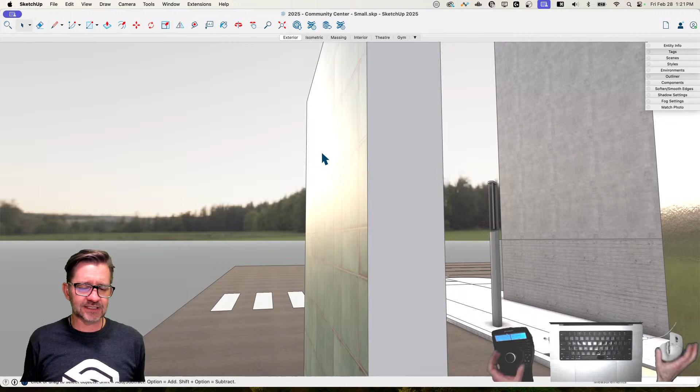That image-based lighting that comes in off of the sky dome affects everything. So this is a material that's just pulled in, nothing has been done to it. But you can see when the sun hits it, it's like a laminate sheet, just like a big piece of plastic with what looks like tiles printed on it. The sun's hitting it and washing across it just like it did the glass - not quite like the glass, because the glass was all metal with a clear reflection. This is just that color coming in. So there's some diffusion of light, but not to the point we saw on the brick, where I actually see the light playing differently off the highs and lows of the material.

So let's fix that, shall we? What I'm going to do is go back into my material panel, my colors panel, come here to home, scroll all the way down, and there's that material that I had, so I'll double click to bring it up. Here's the information about it - it tells me how big it is, and I have some values for roughness, some default metalness and roughness set up, but nothing cool looking, nothing like normals or anything like that.

If I did want to try to do this manually, I could turn normal map on, and it would ask me to go pick a PNG file for that map and all that. I don't have that. All I have is this image I clipped.

So to get this to work, we have this button right here, which is a little bit of magic. When you see three little stars like that, it means magic - you need a chime noise to play, like fairy bells ringing whenever your mouse gets near it. So that's what this will do.

This is actually the material generator. I'm going to click on it and talk through this - it only takes a couple seconds, which is really cool how fast it is. But what that's going to do is two main things: one, it's going to look at the material and figure out how it should actually tile.

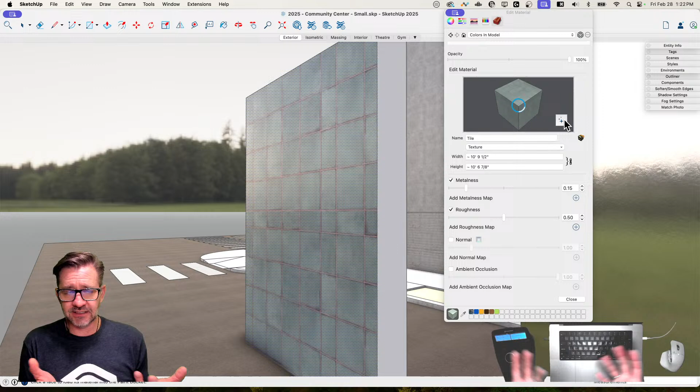Because it's not tiling correctly, it's going to be able to see that it's broken. But then it's also going to go in and look at the material and generate that normal and ambient occlusion map for me. So here's what we got right now - it looks a little shiny, but we can fix that.

So in here, you can see how when the sun hits it now, it's not uniform all the way across - that washout of light doesn't happen. It's more on the tile than it is on the grout, just like the brick was. So you can see the grout through that shine.

And I can actually come in here now - we'd bump the roughness up a little bit so it's not quite so shiny.

There we go. And same thing, I could actually change my normal map here too - is this a ceramic tile where I'd have it more down like this, or is this like a stone tile where it's actually going to be pretty bumpy? I could change that by sliding my slider around.

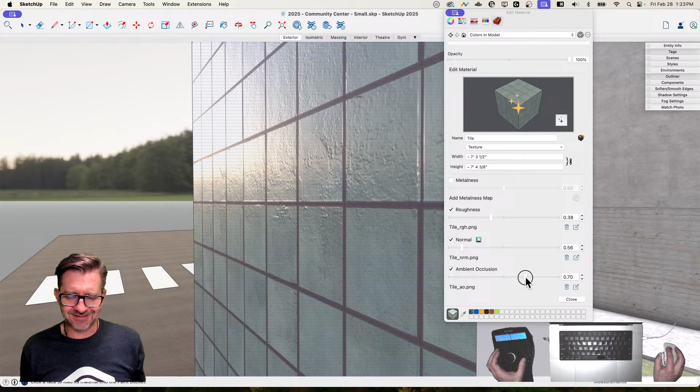And same thing with ambient occlusion - this is where I come in here and say, okay, maybe it's too dark in this case. I can actually change how dark the lows are with that ambient occlusion, which is pretty cool.

And if I wanted to, I could turn metalness on, maybe this has something reflective or some sheen to it. It's pretty cool to go from that stock imagery that I pulled in and see this that looks like a cool material you could have as part of your model.

This is an AI generated material, so it has its successes and its misses, as with all AI. It is also in the progress of being actively worked on.

This is a tool that as you use it more and more, it will get better and better. Right now you might feed it a tile or a material and it comes out kind of weird - that could happen. But if you used that same material a couple weeks later, it might be different, because this is an active tool that is learning and getting better. So, super quick, super easy way to try to bring materials in.

Barry has a question about whether you can create the maps but not the tiling. Along with AI, we're always trying to improve the software. That seems like a thing that would be good to have in there, but we can't necessarily speak about upcoming features - that definitely seems like a valuable one, having a little more control over the creation of the textures. But right now, it's just one button.

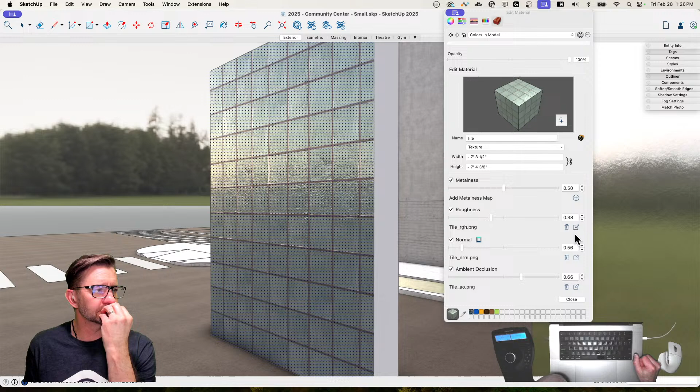So that's how you would manually add a PBR texture in this new materials browser.

A lot of times those normal maps or roughness maps are grayscale versions of the actual color image, with the blacks and whites amplified or smoothed out depending on how rough a material is. So it is possible to generate those on your own if you wanted to. If you had a material and the AI generator just wasn't doing it the way you wanted, you could manually create those. So it is possible, though it's not as easy as that.

But yeah, there is control, and just to tag onto what Matt was saying, this all went through our beta process, so beta testers looked at it, and a lot of you here probably looked at it too. But if you do have specific feedback or requests, it's a great time to head over to our forum, forums.sketchup.com, specifically the feature request section, and put in things like 'AI generator is great, but could I have an option to leave my tiling alone and just generate my maps.' That would be a great thing. Great question.

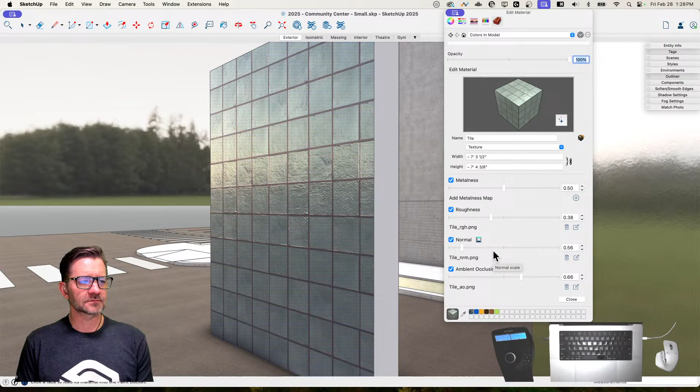I sometimes import organic shapes as STL into SketchUp. Will the shape be shiny, or does it only work on flat surfaces? No, it works on any surface, so as long as the surface has a material applied, you will see that. The flat surfaces were just so we could really get into the look of what the different maps do, the look of different materials. So we have these benches, which aren't super organic, but you can see how the light changes across the rounded-over corners. So it's something - as long as you have one of the new materials on there and you have an environment enabled, you should see the light move over it.

Where next? Is that what you're wondering? We're caught up on comments, so that's good. But definitely, if you have any other questions, let us know in the chat.

Somebody earlier had a question about the Migrate Extensions situation.

So if you look at the overhead camera, as soon as my elbow comes up and rests here, that's a sign that I've got a thing to say. I've noticed - I was watching the overhead camera, I noticed it every time I stop. So that's going to be my... I'm going to talk for a second.

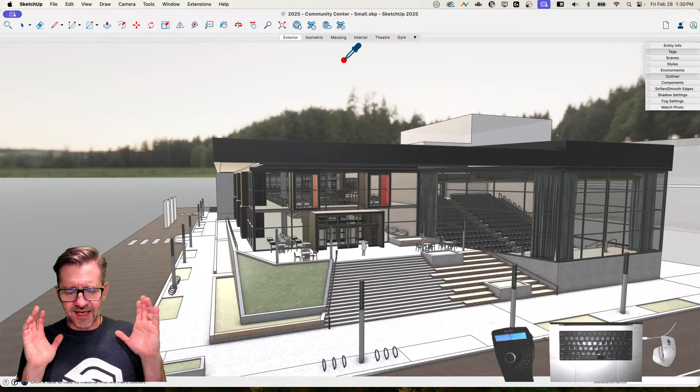Every time we have a release, we get the same questions: does it automatically migrate extensions? And up till now, we've always said no. And I personally have always come back and said I'm glad that doesn't happen automatically. Throughout the course of a year, the 365 give or take days I use one version of SketchUp, I'll sometimes download 20, 30, 40 different extensions. Sometimes I use it for one video, or I try it out and it wasn't what I thought it was, and I need to get rid of it. So I've always talked about a new version being my house-cleaning time - this is when I go back to the old version and check which extensions I want to bring over, mark those and install them, and leave the ones I don't like behind. So I always had this thing in my mind like, oh, it's so good, it's so nice that I don't have that.

But then 2025 came out and we got this extension called Extension Migrator, and I'm just going to show it to you real quick.

So we're going to hop over to the Extension Warehouse and look for it. I thought it might be listed here. Let's see, just look for extension. There it is. Oh man, that's a terrible thumbnail. But I guess it is what it is, actually valid.

All right, so Extension Migrator right here. You can get it, but it only works on 2025. It's the one version it will work on. And if you install it, it gives you a very simple interface that asks what installed version of SketchUp you want to pull your extensions from. So it does have to be installed on this computer. I can't look back to what I was running in 2018. It's only going to look at what's installed.

And then when you click on that version, it's going to pop up and ask which of these extensions do you want to bring over. So two things: it is that simple to pull over your extensions, but that's not a guarantee that every extension that worked in a previous version works in the new version. We can't control what extension developers do with their extensions, we can't force them to update. So if there's a change in the Ruby API or something like that, old versions may not necessarily work, but assuming they work, they will move over, install, and everything will be good.

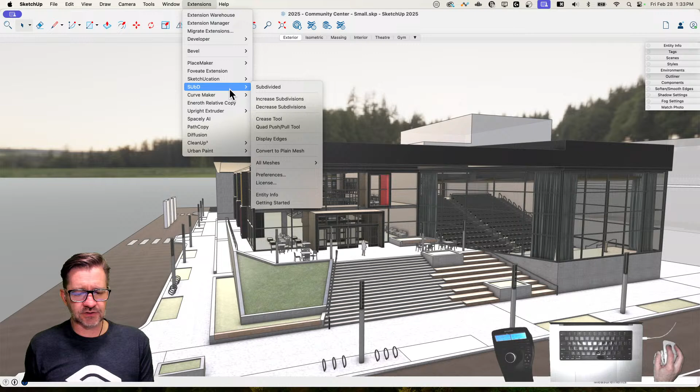But if I hit Migrate Extension, it's going to come up and ask what version you want to migrate from. So if I grab 2024 and hit Next, there's a handful of extensions that I didn't bring over. So these four, I could, if I wanted to, grab them and pull them in. Let's grab building instruction, migrate, and what it'll do is go in.

Oh, this requires a restart. Poor choice, but it will install it. It should still see it, I think. Hold on, reading... maybe not. Maybe I do have to restart to get it to show up. But you can imagine.

It's actually unimpressive — if it works perfectly, your extensions are just there. But yeah, it is pretty cool. And like I said, the fact that I could go through and manually choose which of the extensions to pull over took away my argument of liking to clean house each year, because I can still clean house. I can still choose which ones to bring over, but I don't have to manually go back into Extension Warehouse and say get this one, get this one, get this one. So I am super excited, it's super nice to be able to go in and just grab those.

And one point James had a question on: does it migrate all the extensions or only Trimble approved extensions? It just looks to your plugins folder from your previous install. So it doesn't matter if you got them from SketchUcation, Extension Warehouse, or some third party place where you found RBZ SketchUp extensions. As long as it's in your plugins folder in that version, it'll bring it over. So you can choose to migrate it if you so choose.

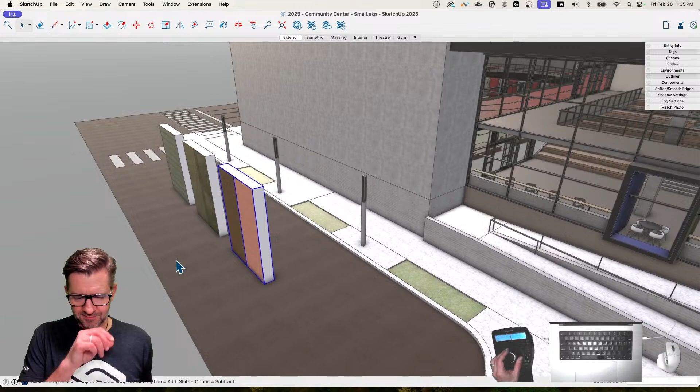Is there a way to change the material or color of a live object? Did you want to show a live component? Sure, let's hop into 3D Warehouse. There is a way, it's kind of not obvious, so we'll show you how to do that.

Go to libraries real quick, and I'm going to go to models. Is there one that you know is a good one to test this on, Matt? If there's like a coffee table, that's usually an easy win.

So in case you guys don't know what we're looking at, these are called live components. These are parametrically built picnic tables. Think that would work? Sure.

It would change, maybe one with two different materials, so sure. You could show maybe the outdoor lounge seat. Right, looks like it has two different materials.

So the way these work is different from other models on 3D Warehouse. In case you guys don't know, everything on 3D Warehouse is just an SKP file. That's all it is. We call them components versus models versus whatever you want to call them. They're all just SketchUp SKP files. Live components are a little bit different in that there's a parametric editor.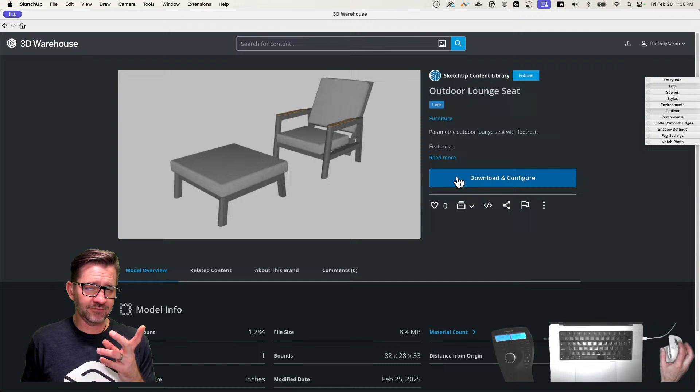That editor lets me change the properties of the model before I pull it into my model. And then once it's in there, assuming I don't explode that container, I can actually change the properties of it once it's in my model as well. So if you haven't seen us work with these before, that's what a live model or live component is.

So let's get into our model. Okay, I'm going to drop it right here. There we go. I want to show this real quick because I'm a simple guy.

One of the things that got added to this version of SketchUp is when I'm in rotate, not move, but rotate, I have the handles that I have available in move. So if I mouse over this, I can actually grab it by handle and then rotate.

Sorry, there we go. Or not, acting weird, yeah. Talk about how much I love this. We got pretty far without any issues, aside from my mic not working and your overhead camera not working. Other than that, yeah, maybe try a different component.

Let's try this, let's try my monolith. I come in here. Huh, that's new. So I'm just going to go ahead and turn this around with the move tool so it's facing towards this.

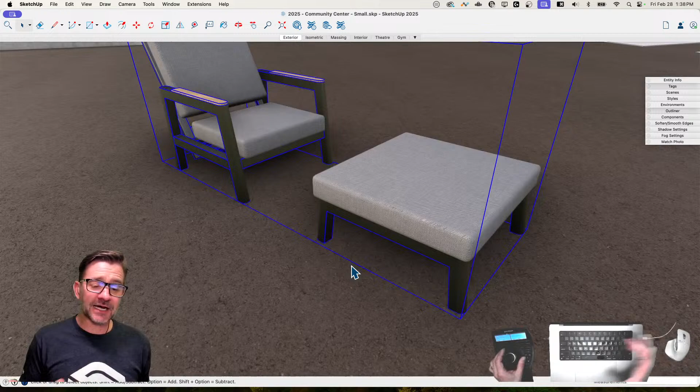Okay, there we go. So I got a couple materials, I actually have 3 materials on here. If I say configure live component, it's just on the other screen. This is going to give me the ability to, again, what is a live component? I can come in here and change how wide this is, how tall it is, depth.

Seat height, I like that. Oh yeah, let's get cushy, bring it on. And toggle that footrest on and off. So this is the kind of thing that a live component lets me do.

One of the issues that's always come up in the past is if I wanted to change the colors of anything, I basically had to explode the whole thing. Exploding it means I lose connection to the live component editor, and at that point it just becomes geometry. Sometimes that's fine, but sometimes I want to color it while still being able to edit it later. Well, there's a couple of caveats with live components and coloring them.

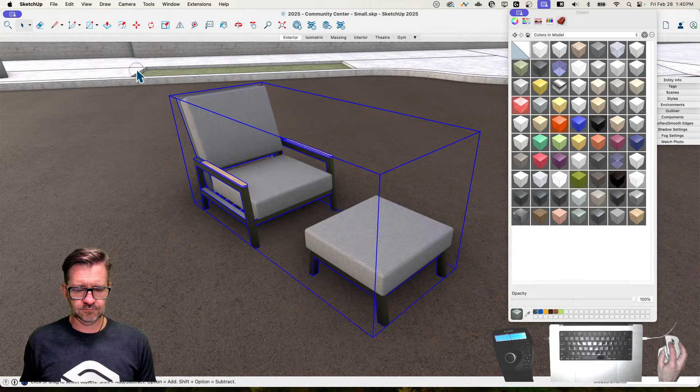So first thing is, this is just how live components work, they're always being improved, but when you download it, you do have to configure it first in order to paint it. You have to change one of the parameters from the default, and then you have to deselect it before you paint it. You can't have it selected or else it won't work. That's just how it goes, that's how it works right now.

So just to call out in case you're not seeing the same, maybe deselect that back thing too. We learn when you do, everybody. There you go, so it has to have nothing selected. And it'll paint all the materials of that material in the live component.

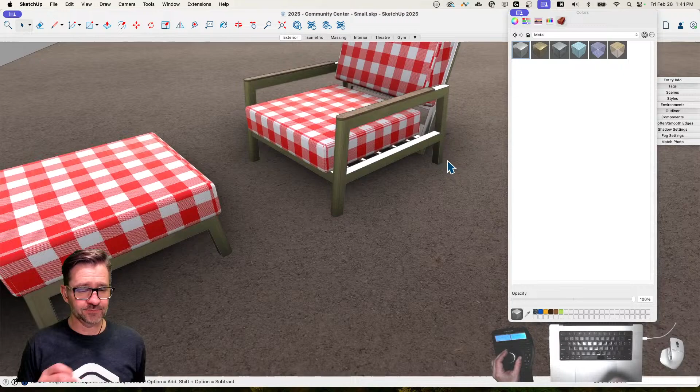That's how it works as well. And if you're used to editing components, rotating them or stuff like this, that's not available in live components at this time. So look, you can put materials on it. Is it a perfect streamlined process at this moment? Probably not 100% what I want in there, but it's definitely a step in the right direction.

Like with everything, we have people mentioning artificial lighting and stuff like that. Look, the visualization is moving in a certain direction. Last year was ambient occlusion, this time we have the materials and the environments. Yeah, it would be stunning if we had everything all at once, but live components are a work in progress, just like everything else in the world.

Somebody called out that I was clicking and dragging, which you shouldn't do in SketchUp - click and release. But in Rotate, I have these handles now, and the nice thing is they let you rotate about the center of a face or a volume. So if I wanted to rotate about the edge of this foot, I could grab right here and rotate about that point. But if I wanted to just grab the whole chair and spin it around, I could click right here and move it around. I was dragging - that was totally on me.

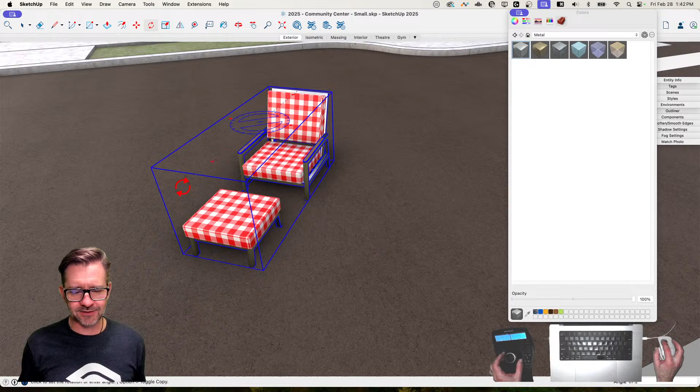Nick does say when you use the move tool, you do click and drag, so it's a little bit different. Your muscle memory could have been doing you a disservice there. Oh, stupid muscle memory.

Why, when you explode a live component, do the parts come in as groups rather than components? At the top of the show, Aaron said the developer team looks at our forum for feature requests and comments. So let your voice be heard on the forums.sketchup.com - go to the feature request area and put a note in there because they will look at it. Our product management team is always over there. Caveat: creating a post in feature request doesn't guarantee it's going to get done immediately, but they will hear that you need that. We have little to no influence over what actually gets done - we're just the pretty faces and voice.

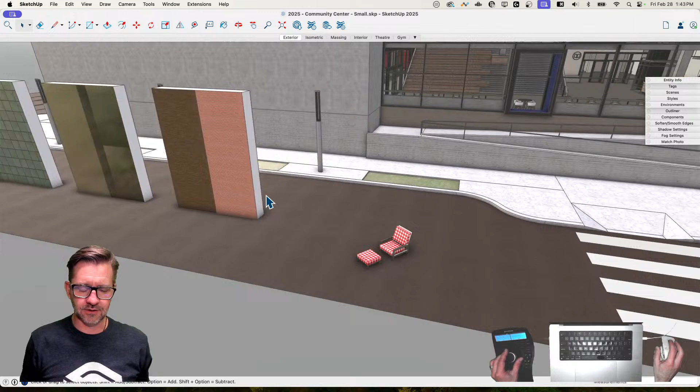Somebody had a question about tools before, and he showed the rotate tool. I wonder if you want to show the double click on the arc functionality. Yeah, let's see some fun stuff. Let's see where can I put this - I'll put this right here.

See a little pink line right there? A lot of people have caught this, and some people have not yet picked this up, but double clicking on geometry - let me get more geometry to play with here. So a couple things just happened: one is I just left the arc tool and came back into it, and look, I still have this visualization of these corners. So when I double click, I can actually double click there and get it to cut those corners off. I don't know how you got that to work when you were off the face - I thought you had to be on the face. Sometimes you got to not think and just start clicking. Look at this Utah - it's the rounded Utah.

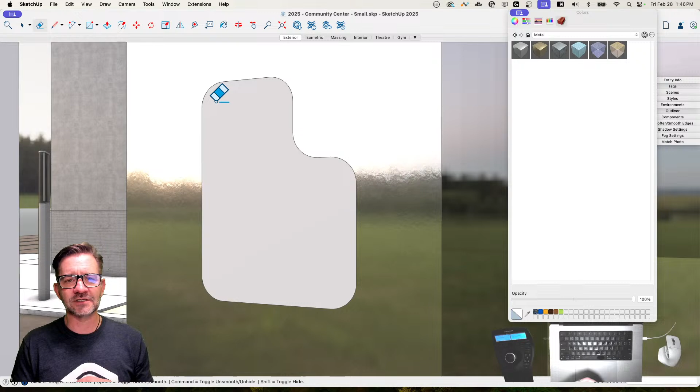Ooh, I'm going to grab this one. Yeah, ooh, look at that. Oh, look at that.

That is cool, gold foil on there. Love to see that. And also for people who don't read the comments, I just want to point out, thanks Colin for diving into the details and knowing all the nitty gritty about the updates.

For live components, you can commit to the current look of the live component. So instead of exploding, you could say detach definition, and that would keep it as a component. Right next to explode, you can say detach definition. Then if I come over to components, or entity info, you can see it's a component.

I was going to grab it and bring it back in again, but I don't know where it is. There's a lot of stuff in this model. Let me check this and see what the name is. Okay, that should be towards the top. So if I brought that in again, it would show up as its own version and not connected to the geometry here.

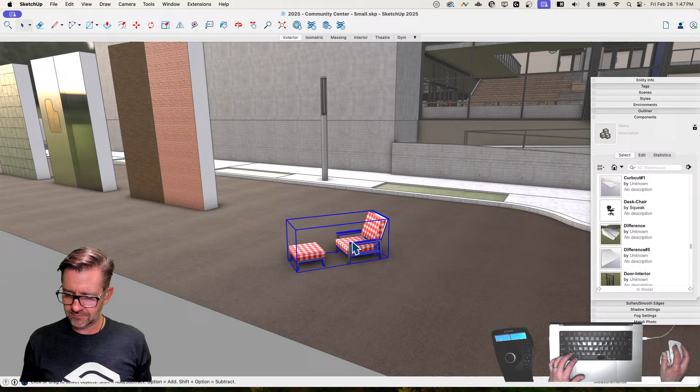This is why we plan to model ahead of time and just stick to that, because you can make a copy of it and move the ottoman. You won't have the parametric sliders anymore, but it would still act as a regular SketchUp component, that's the idea.

So I undetached that, it didn't undo. So now if I detach definition, I can grab this one, configure it, and then just make changes to it. It will only affect this one and not the other one.

Let me make this the most awkward chair ever to sit in. Oh, it's terrible, sit down. This reminds me of character creation screens in video games, you always go to the extremes to see how terrible the ogre face looks, or whatever.

There we go, it's like a Minecraft chair. Donovan will be happy with that. So you can, without actually breaking it, cut it off from the definition, so it's its own version. Cool.

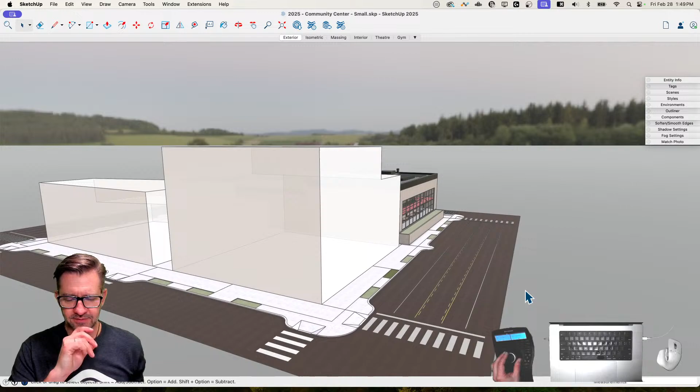So this is a super cool model, love what Eric did with this. We can go faster on this side because it's boring. Come in here, check out this two-story window with the running track above the basketball court. Oh, so cool. That basketball court is a dynamic component too, just FYI, so you can choose the number of courts, number of keys put on there, all part of it.

Pretty cool. The monoliths here are not part of the model, so when I upload this you won't see those, but easy enough to make your own. You guys just rewind it back to about 40 minutes and follow my steps of drawing a rectangle. Let's see if we can get in the front door here.

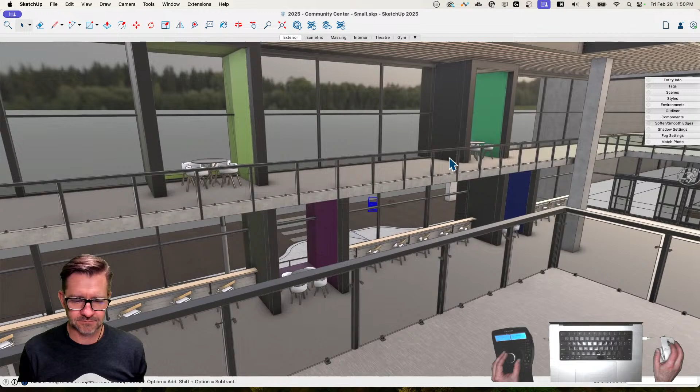Yeah, I want to talk about those little colored cubbies too. I mentioned this earlier, but we had an idea that these would be like spaces you could check out if you wanted a little meeting space or working space. I'd say I reserved the purple room for 45 minutes or whatever. So I just thought that was a cool little addition, adds a little color to the model as well.

Yeah, I love the way, especially from the outside, they look. Here are the main windows coming through, and they kind of come out like 1.5 feet, adding that color to the side of the building, which is super cool. I love the way that looks. Again, a fun little piece of design that happened unintentionally as this was being created.

Yeah, there's that indoor seating Matt likes. Very cool, yeah, and then up here.

So, like I said, we did some stuff to make this a more performant model. This is the library area, the books and all that stuff. You guys know how big and complicated a model can get. When we had a couple thousand books in there, it weighed the model down quite a bit. So now we really just have the building, and took a lot of the furniture and stuff out just to make it work as smoothly as it is.

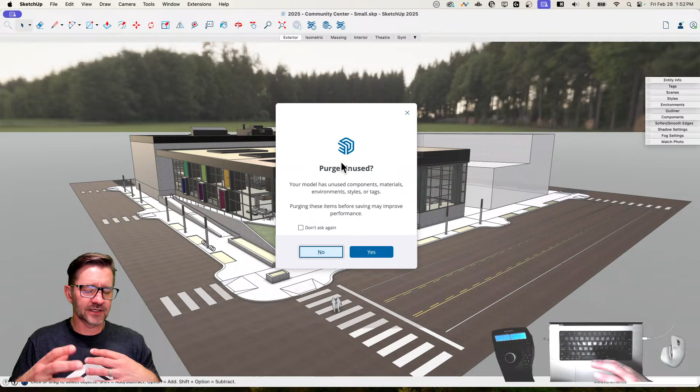Yeah, there we go. Let's just clean this up right now. Oh, you know what I should do? I should hit save, which I'm trying to remember how many years, the longest time. This button right here is now connected to save. So because I just downloaded a bunch of live component, some extra materials, if I hit yes, it's just going to get rid of all those extra things before it saves my model, which is pretty cool.

I'm going to do one other thing. I'm going to put it back to that sunset lighting. Is that this one? Or sunrise? Nope. Yeah, that's it. You probably just have to rotate it. Oh yeah, because I messed with my... there it is. Oh, I just love it. I love the way that light hits on the side. There we go. Let's save it again.

So I will throw this. That was getting rid of the now newly unused environment. Yeah, I love this. I'm going to get this. I will put this up on 3D Warehouse. We'll put a link to it in the forum.

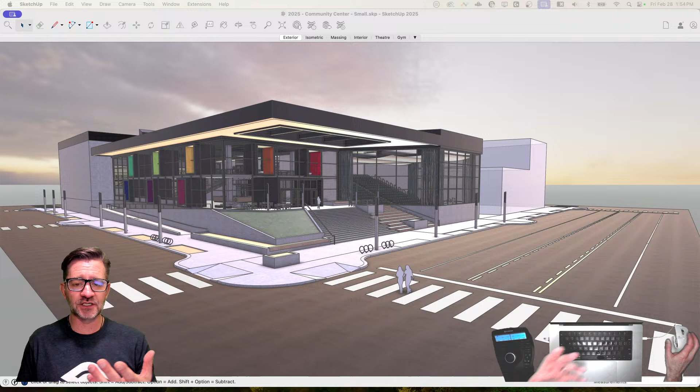Yeah, hopefully come back next week. I don't know what we're doing yet, but we're gonna do something and it's going to look great. Next Friday, yeah, and we're gonna start from the ground up with this version of SketchUp, and it's gonna be cool. So we're gonna have it from the start. You guys have to come back and remind me because I will start in the white space and just start drawing stuff. But let's get ambient occlusion on, let's model with materials on, let's model in an environment from the start, and we'll figure out what would look best in that, and we'll start modeling it right away.